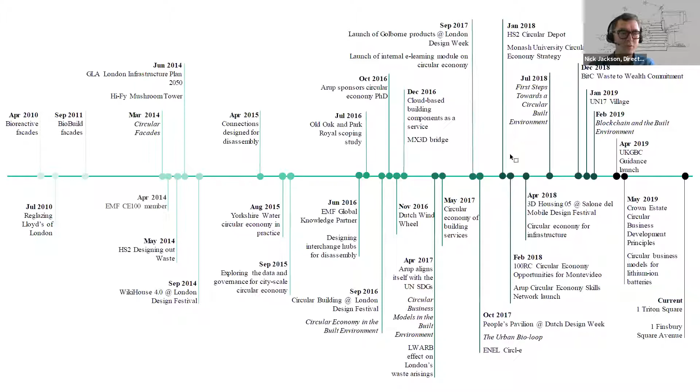Triton Square didn't come from nowhere. Arup have been working in this sector for over a decade in terms of thinking about circular economy. We've been looking at it from a point of view of investment, experiment, exploration over 10 years. We've worked in that sector developing a framework for property in terms of developing a brief that we use internally around the planning, the design, the use of materials, all building around our approach to circular economy. This works across our whole business and is a strategy that is growing very rapidly in our thinking and work. Our relationship with the Ellen MacArthur Foundation is well established, and we have a very close partnership there.

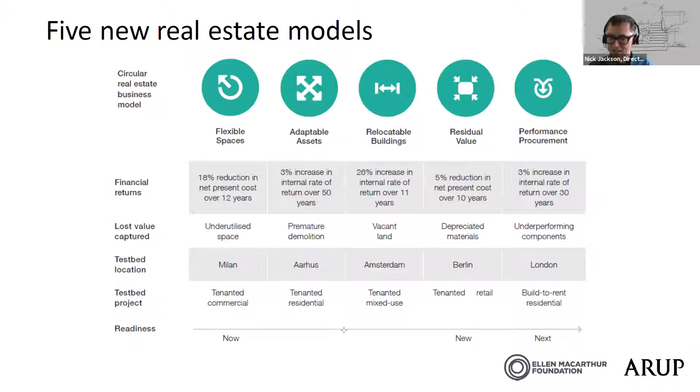That has worked through equally with developing an approach to real estate across a number of trial projects we've developed in conjunction with other partners like RICS and JLL, in terms of how we embed circular economy thinking in our approach. So I just wanted to set the scene in terms of where the thinking on the project at Triton Square has emerged from.

That sits alongside our commitment at Arup to align our business in all that we do and our activities to the UN's Sustainable Development Goals, the SDGs. As a global organization, we've adopted those 17 initiatives and goals to structure our work at all levels and embed in our strategies around design work and the projects and thinking that we take on.

At the moment, we see ourselves as on a journey. We're moving out of a point of green, sustainable design and looking increasingly to how the thinking in our work can lead towards restorative and ultimately regenerative design in the way we approach our work in the built environment. So that sets the context for Triton.

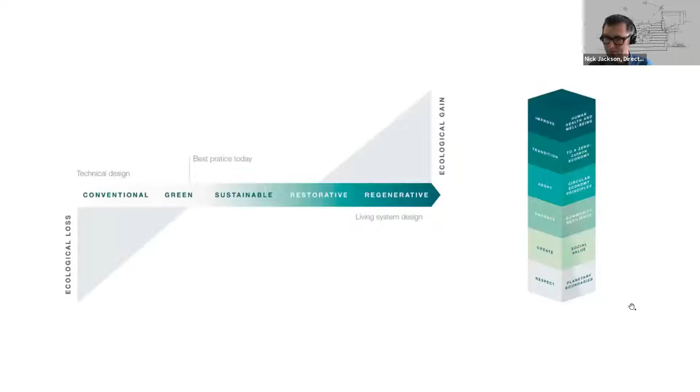The simple headline really is the work that we've achieved there has saved approximately 40,000 tons of CO2 emissions over the 20-year life of the lease. That is made up of embodied and operational carbon. And obviously there are many ways you can equate that to understand what that means, but in simple terms, in what a car does, it's a pretty staggering figure.

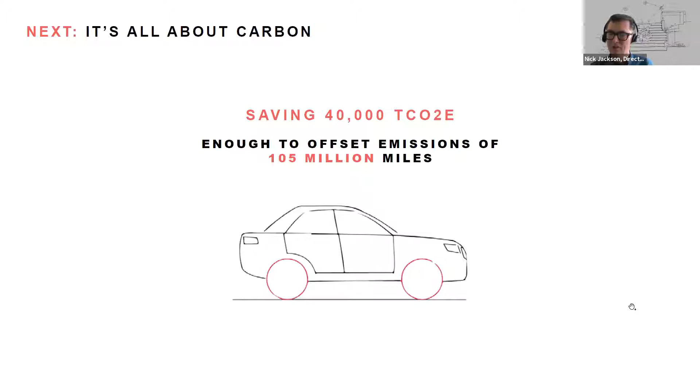And that work has come from a whole series of initiatives. There are some headline design changes or design initiatives in the project we've brought to it, but there's a lot of other smaller moves, which I will explain as we go through.

So the project, just to give those who don't know the building, when it was pre-let to Dentsu Aegis, it was the largest West End pre-let in the last 20 years. We began with a design and brief that was about achieving BREEAM Excellent, and that has moved over the course of the project to achieve BREEAM Outstanding, which is one of the first buildings for British Land, certainly, that has achieved that landmark, and one of the few large commercial buildings of this nature that have been able to achieve that as a standalone building that's not linked into a large energy network.

It's 500,000 square feet. We've saved 40,000 tons of carbon through the various initiatives we've brought to the scheme, 54% reduction in the embodied carbon. What we did demolish, which was very limited, and the waste was all diverted to other uses. So initiatives like plant that was taken off the existing building has been upcycled and reused, exported and made use of. We've made significant reduction in water usage on the building.

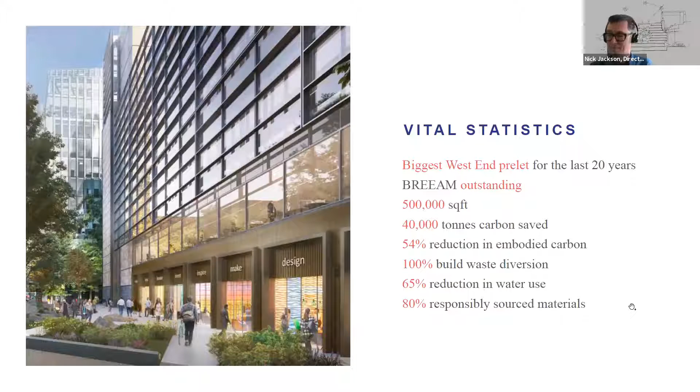If you think the original building was designed in the 90s, a lot of the approaches we can now bring to the design of the building weren't available then. And 80% of the materials we have used, we've been able to responsibly source. We would like that to be higher, but that is a reflection on the marketplace that we're procuring from.

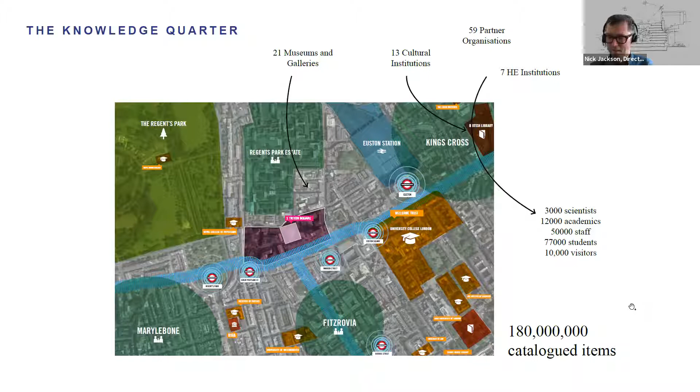The building, for those who don't know, sits in the center of Regent's Place on the Euston Road. It forms part of the Knowledge Quarter, which, as I think everyone will know, is a very vibrant and rapidly changing sector of London on the northern edge of the West End, and becoming increasingly a location for research and academic work that obviously has grown since the Crick opened. To the south, we have Fitzrovia, UCL, and Marylebone with its education institutes and museums and so on.

The trigger for the project really gathering pace was the pre-let from British Land that really galvanized the scheme into moving forward. And the approach that we've taken to sustainability and carbon has been embraced by the tenant, Dentsu, in terms of the way they're thinking about their fit out, which will start very shortly, fully designed at this point. The building will complete during April and be handed over to the tenant team to progress into fit out.

So the thinking we brought to this, in a way, there are some big moves we've brought to the design thinking, but actually it's all the small moves really that have been the key to the changes we've made. The strategy was to really look in every area of the design, every part of the thinking, and bring the same attention to detail about what can we do to reduce the amount of material we use, what can we do about the carbon content of material, what can we do about the recyclability or the reusability in terms of circular economy thinking to the scheme.

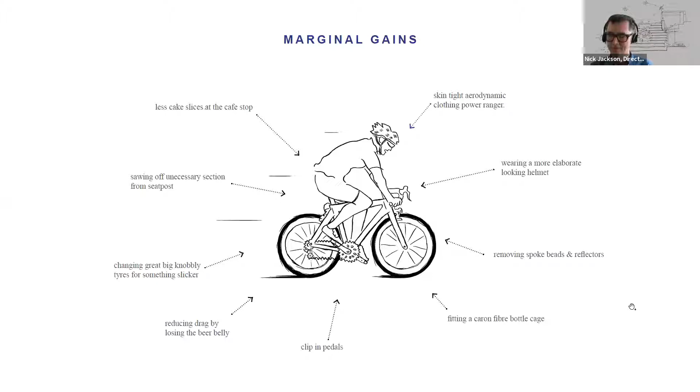So that sort of initiative that one sees in sports and so on, and obviously cycling is an obvious reference for that, has been brought to bear in all sorts of parts of the building.

So the headline story, like all refurbished buildings, is obviously we've been able to take advantage of repurposing and reusing the existing structure, bringing our engineering thinking to that to minimize the amount of new structure we need to bring to the scheme.

The approach to the facades, where we have removed large sections of the existing facades, and rather than replace them to upgrade them, we've refitted them, refurbished them, and brought the same material back on site and reinstalled them, which is, we think, probably one of the first examples of that being done, certainly in the UK, if not in Europe. We've made other changes to the scheme, which Phil and Christina will talk about.

Things like changing the staircases, so they no longer sit within the primary thermal envelope and are heated all the time. We've moved those so they're no longer part of the primary heated space. They're tempered so they don't get too cold, but we've moved the thermal line in the building to change the energy usage.

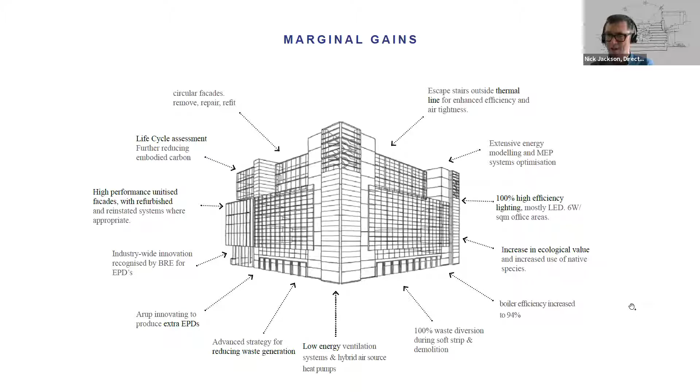We've replaced all the plant on the building and upgraded it very significantly to highly performing plant. We've taken advantage of the capacity of the existing building to allow that to work in a highly efficient way, and a whole number of other strategies that we brought to bear.

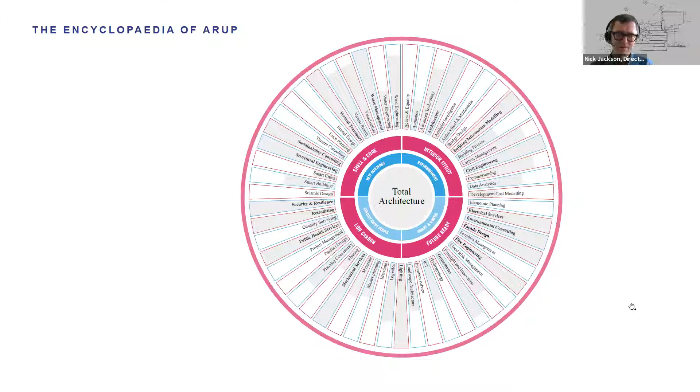The project has been designed by all the disciplines within Arup, so the architecture team, who now sit within Arup as a whole, worked closely with the engineering teams on structures, MEP, lighting, acoustics, and sustainability. They all contributed at various stages, particularly in the analysis of the use of existing fabric and materials. The carbon team within our sustainability team put a lot of work into areas we probably hadn't looked at before in this depth on One Triton Square.

The brief was quite simple: to make this make sense for British Land as a development, we needed to double the size of the building. That's a pretty simple metric, and most architects will recognize that on a big refurbishment or rebuild project, you need to achieve that level of upgrade. That was a challenge with the existing building and its foundation system, to create that area without changing the footprint of the building. We've developed that in a number of places, which Christina will explain.

It needed to be highly efficient. We needed to hit very high net-to-gross ratios and make sure all the operational areas worked efficiently. Sustainability and well-being were embedded right at the outset in thinking about the building. We needed much higher ambitions in sustainability and carbon energy usage than the original building, but also a wonderful building to be in, with really good daylight and an enjoyable space to move around and work in, to attract tenants. That goes hand in hand with quality.

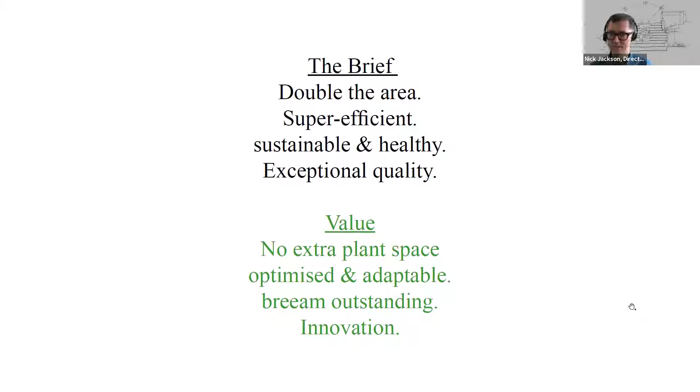The key value changes we brought were doubling the floor area of the building without changing the area given over to plant. It has a single basement, highly constrained. We put a lot of cycling facilities into the building that weren't there in the 90s building, and we kept the same area of roof plant we had originally—a little bit taller maybe, but that area is working much, much harder in terms of what it can deliver for BREEAM rating, which required a very innovative approach.

Originally we were just looking at BREEAM to think about what we could achieve, and we moved that target from excellent to outstanding over the course of the project, without the level of cost increase one might expect. That cost is relative to what British Land would normally see as the budget for a building of this nature, but it was very marginal—much more down to where we put the effort and thinking hard about where we spent our budget in terms of materials and engineering.

The original building, by Arup Associates, from 1998, was built around the time Canary Wharf was really starting to gather pace. It was built as a support building for a trading bank—going to have trading capacity, but used by the original tenant as a support building. It was a big building with corner cores, a low-rise five-story building that reflected the horizon of Regent's Place at that time. But it was a well-built building, and the key thing is we had all the records and information on how it was built.

We had all the drawings, the working drawings from contractors like Scheldebouw, and our own design drawings and engineering. That was a fundamental prerequisite for the re-engineering of the building that we were able to go through with the new design.

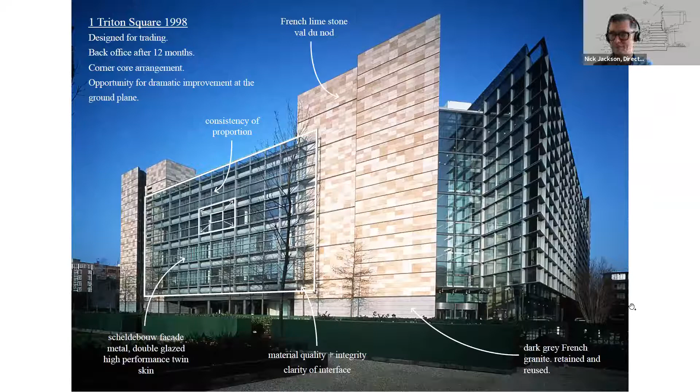The existing building is quite deep in plan, and it has this unusually large octagonal atrium in the centre of it, with a roof light above that.

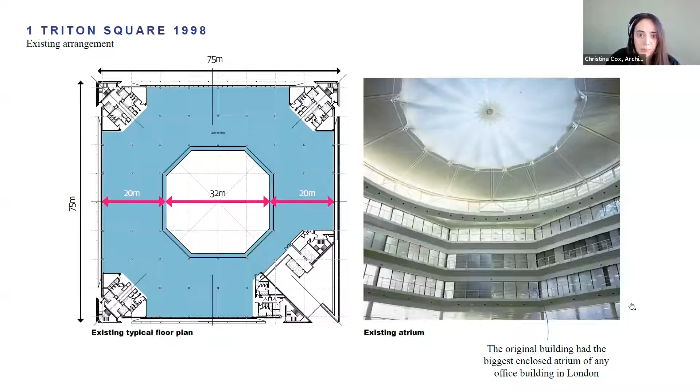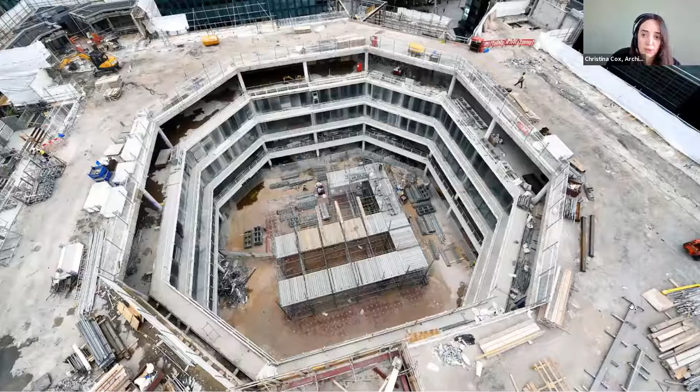This is an image towards the end of the demolition phase, where the plant is all removed from the roof, the roof light's been removed, and the top of the cores have been removed.

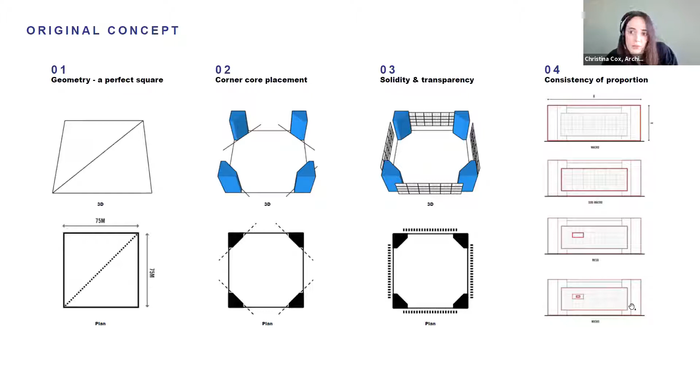In terms of the original concept for the building, the original design principles included a perfectly square plan, four corner core placements, and secondary screens cladding each elevation. There's also consistency of proportion from the macro, the overall elevation, through to the micro, the individual panels making up those secondary screens.

So when we were considering the refurbishment of the building, it was important to be considerate of these original principles. The key interventions included consolidating the central atrium, bringing it in from 32 metres across to 17 metres, and extending the cores upwards. When we extended the building upwards, we set back those levels, not only to create some amenity, but also to maintain that consistency of proportion across the elevation.

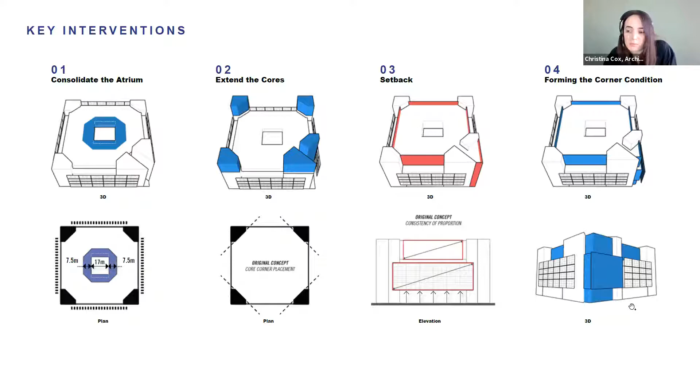And then finally, reconfiguring the main entrance area to create a more dynamic reception area that fronts onto Regent's Place.

In terms of the building organisation, the four cores serve the office levels, level 1 and above, and the ground floor plane, which is mixed use, is accessed via the perimeter. Originally the ground floor had an undercroft cutting right across the centre, and the ground floor facade was also set back, so we've pulled the ground floor facades out to better address the public realm.

To the north, there's an affordable workspace area. To the west and centre is a large gym area with a cycle storage area in the centre of the deep plan. To the south is a dedicated secondary entrance for the office, a retail space, and the main entrance facing onto the plaza.

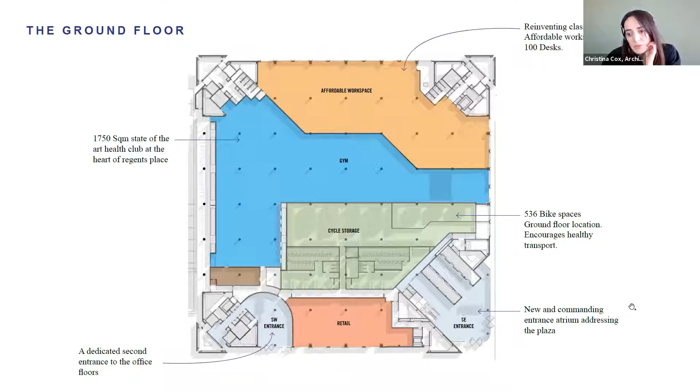In terms of the typical upper levels, as mentioned, the atrium was infilled, so it has a stepped profile to create a more dynamic space. The lifting strategy was also reworked, with the main lift bank now including an extra four lifts, and an increase in the washroom areas in the cores.

And also infilling the six-storey atrium that sat above the original entrance, not only to create more floor area, but also these smaller balconies that look out over the Regent's Place Square.

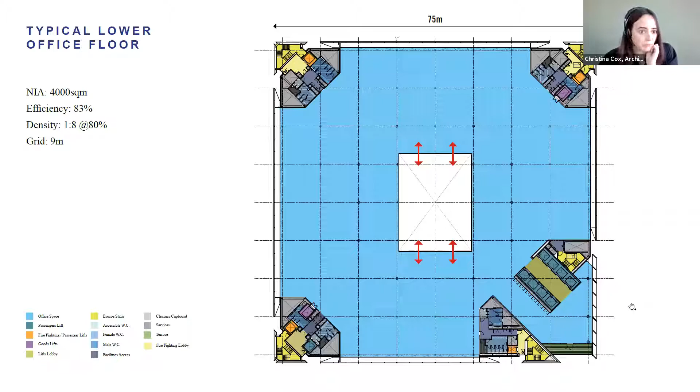Through those interventions, we managed to increase the office area by 85%, and as Nick mentioned, with no additional space for plant required.

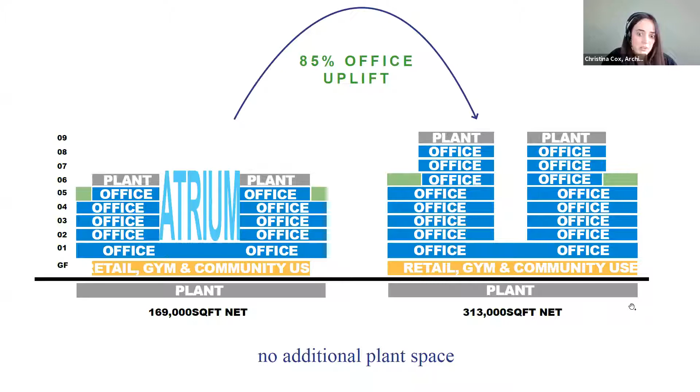Thank you, Christina. Within that move to create this almost doubling in the net area of the building, the work we started doing as the project developed in the early stages was looking at the combination of what the operational carbon was, which sits within what we do normally, but starting to look increasingly at the impact of the embodied carbon.

A key factor for us as we look forward to other projects is that as the energy supply grid increasingly moves towards all-electric buildings, we see most of the buildings we're now designing as all-electric. As the grid cleans up, the emphasis and importance of really understanding the embodied carbon in design thinking becomes increasingly critical.

That underpins the deep rationale we're now asking ourselves with all our projects across Arup when confronted with a proposal: is there something there we can reuse? Do we really need to replace a building, or is there a way we can repurpose it? If it's in one use, how could you transform it into another? What can we do with our engineering and design thinking to understand that impact, because we see embodied carbon as an increasingly important factor in the overall carbon impact of projects.

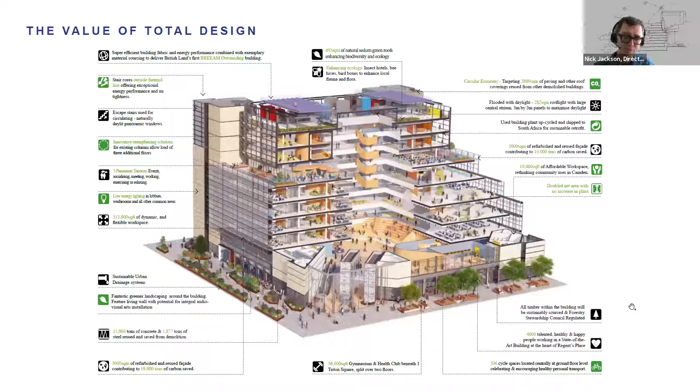We've got recycled paving and recycled ballast that's come off another building that we've been able to use on this building, rather than going out and buying new river ballast and new slabs just for walkways.

The existing building had 35,000 tons of concrete and 1,877 tons of steel reused.

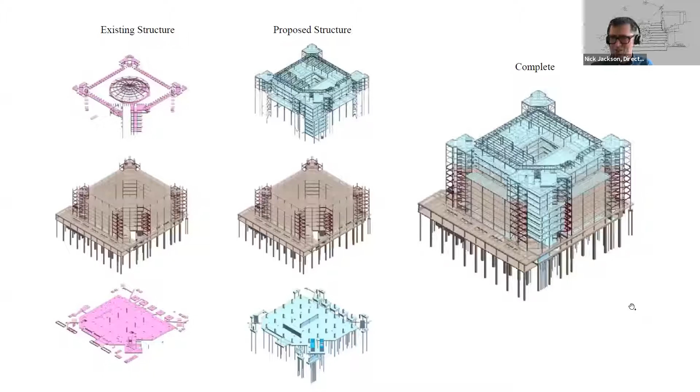The brown on this slide is the existing structure, and the blue is the new. So we peeled a little bit off the existing building at roof level, took off the roof lights, took off the top of the cores, took off the BMU tracks. We've retained the body of the building, and we've retained all the substructure and so on. There should actually be some piles hanging off the bottom of that pink plate.

And then we've basically inserted this new structure in and around the existing structures—adding floors down over the reception that Christina talked about, inserting additional piling underneath the building to pick up the load, and then a very light, efficient composite steel and concrete structure on top, all with low carbon GGBS concrete.

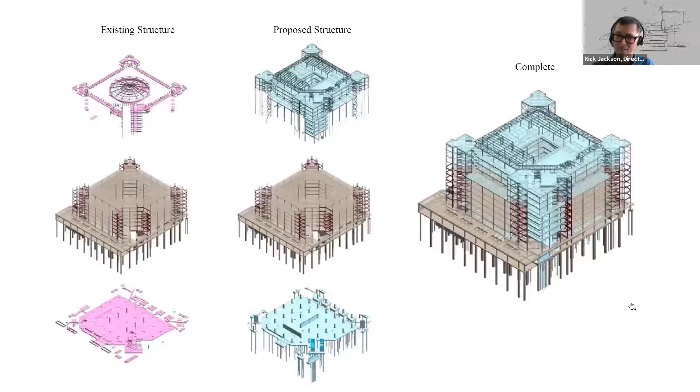So whilst we might now consider exploring whether we could use timber for this, that's still very challenging in commercial buildings. We looked hard at where we were having to use concrete to really reduce the amount of carbon.

So we have this lightweight steel frame that drops in over the existing building. Our engineering colleagues and the structures team did a lot of work to reanalyze the existing foundation system from the design records, and relocate or reapportion how we were using the loading within the building, because it had been designed with some quite high loading in areas. We were able to transfer those loading allowances around to create the capacity to get this extra space and get the building.

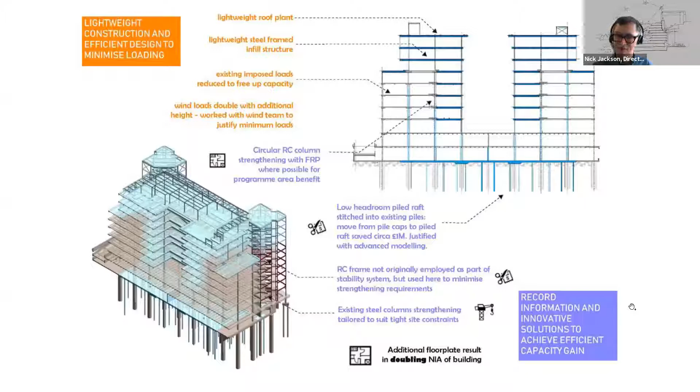Down in the ground, that was pretty heavy work in places, working underneath the existing slab. We had a low headroom piling rig in there. Where we could, we were using carbon fiber wraps on columns to strengthen those, in conjunction with threading piles in.

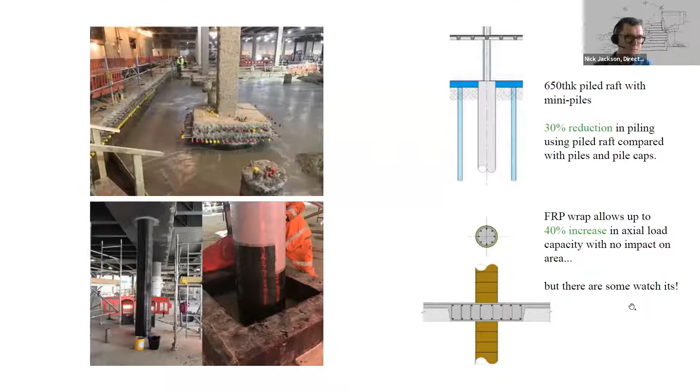There were localized areas where we had to take the existing slab out to thread piles through. But because of the engineering analysis, and because we had the records, we were able to have confidence in how we combined new and old. That meant we could reduce the amount of caution in some of the design decisions, to really optimize the design of that foundation system.

A nice view here through the basement while that work was going on—you can see in the distance some little steel frames going up around.

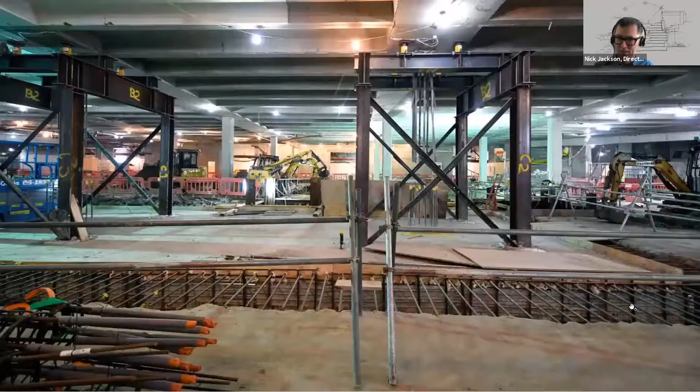There were one or two columns that, despite all that, we couldn't justify when we analysed the as-built condition of concrete. So there were 5 or 6 columns where we had to prop the building, take out columns, knowing the reinforcement was there, supplement that reinforcement, and recast them in key locations around the atrium where they were picking up the highest load.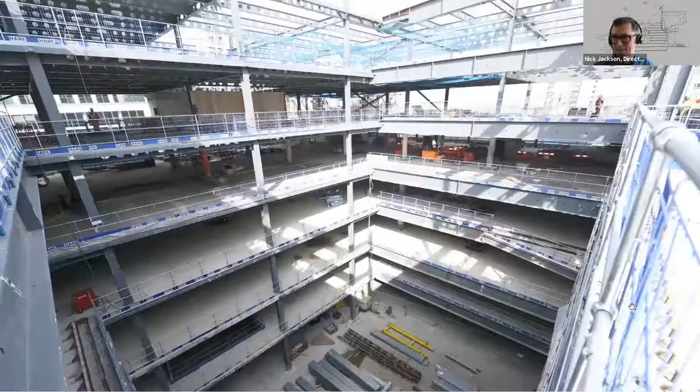So this is the reformed atrium—still a very, very generous space, a fantastic space to be in. Once the tenant is in there, they're adding some staircases, I believe, to run between floors. It will be a terrific heart to the building.

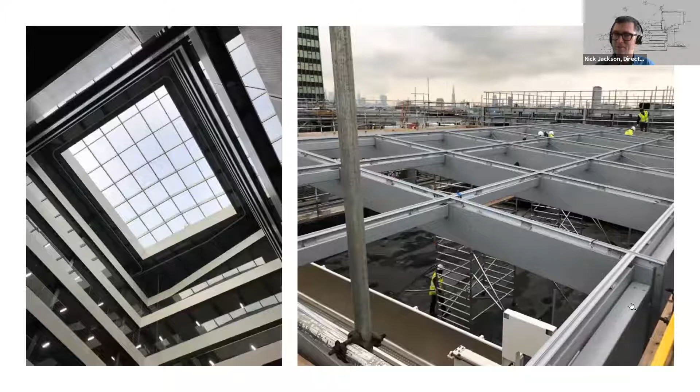The new roof light lets light down, and it's got a very nice, simple, elegant graphic quality to it.

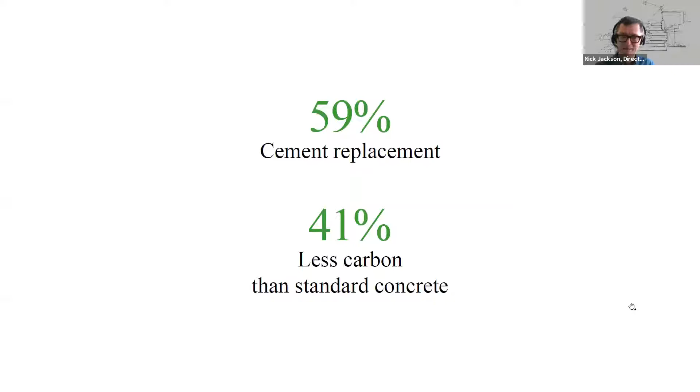The concrete work in the new structure was 59% cement replacement, giving 40% less carbon in that element than we might have expected in a normal hollow rib type floor system.

And then the last part of this short discussion of what we've done—we're going to explain the approach to the facade, which Phil will take you through. It's pretty unique, we believe, in terms of work on a building of this nature, really being able to combine new and old structure.

Yeah, so we had around 3,000 square meters of facade on the building that was refurbished. This was taken off the building and sent to a factory in Basildon, where it was inspected, cleaned up, gaskets replaced, repaired, and glass panels replaced if necessary.

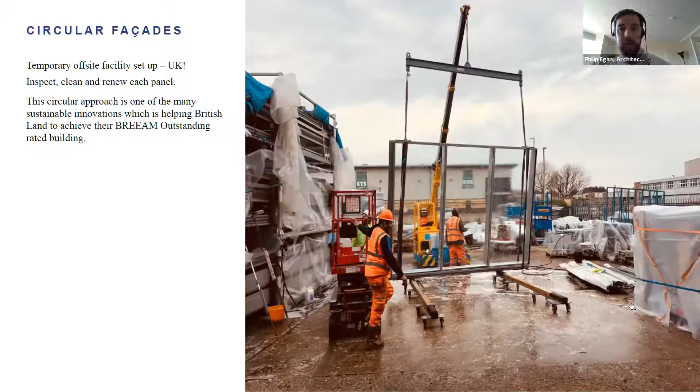So it's just a photo of that. Looking at the building as a whole, we basically tried to retain as much as possible.

So not including the main entrance facade on the left-hand side, we more or less retained the majority of the facade from level 1 up to level 6, and we retained all the stone on the cores from ground floor up to level 6 also.

So basically the double skin existing on the building is the central part of the building. The outer skin was taken off and refurbished, while the inner skin was largely retained, cleaned up, with any remedial works done. The glazing in the inner skin was taken off and replaced by new glazing in order to create a more energy efficient building.

The lower part of that double skin was completely removed because the whole facade was moved up one level. So we took off the lowermost panels. The supporting structure that fixed back to the slab was also modified, and that was replaced back up on the new level 6 slab.

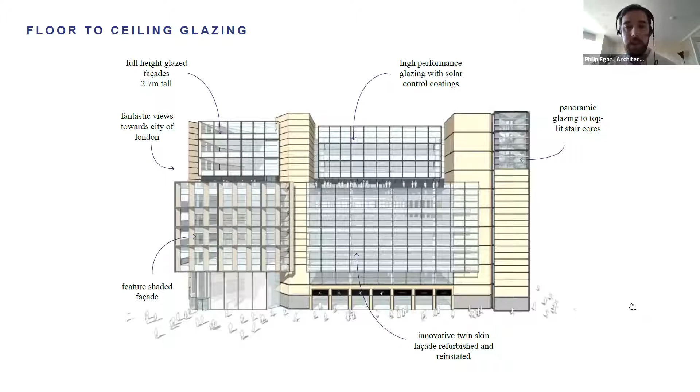So if we move on to the cores, as Nick mentioned previously, we're retaining a lot of the facade at the lower levels, and we've got these new glazing panels at the top, which give us great views out and around over to Regent's Park, over to the financial area of the city, and also up to Parliament Hill.

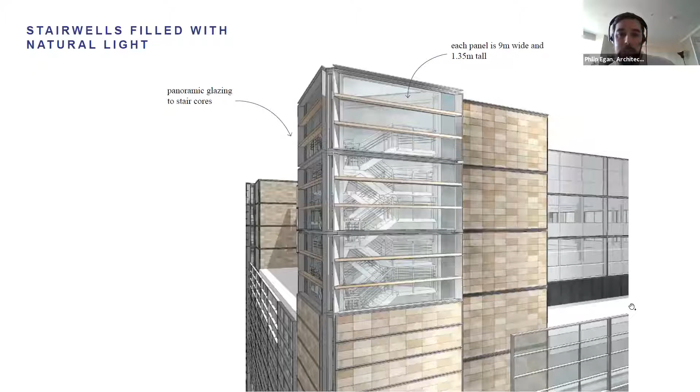So that lets a lot of light down into the stairwells, and we also moved the thermal line back towards the office itself. The existing facade was somewhat leaky, so we thought it was a better opportunity to do that and have a second layer of defence for the building.

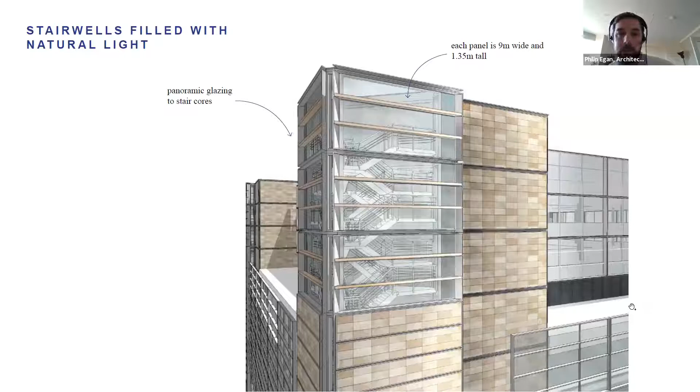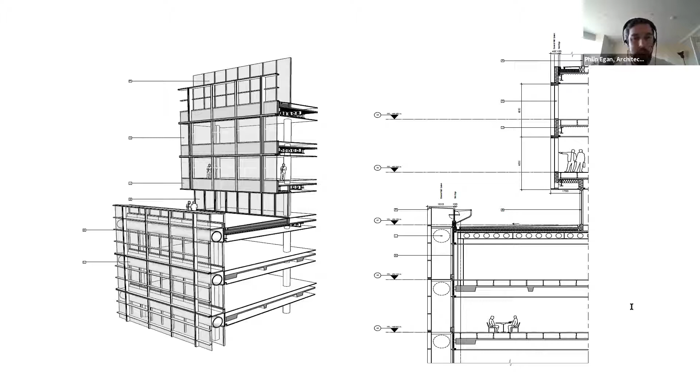So again, moving from top to the bottom of the facade: at lower level we removed a whole band of facade, which was taken off, refurbished, and put back on at a high level. The outer of the double skin was refurbished, and the inner had new glazing, more energy efficient. We then got 6 metre wide terraces about level 6, and from there we have a new facade upwards, again all energy efficient coated glass, and also brise-soleil on different facade elements.

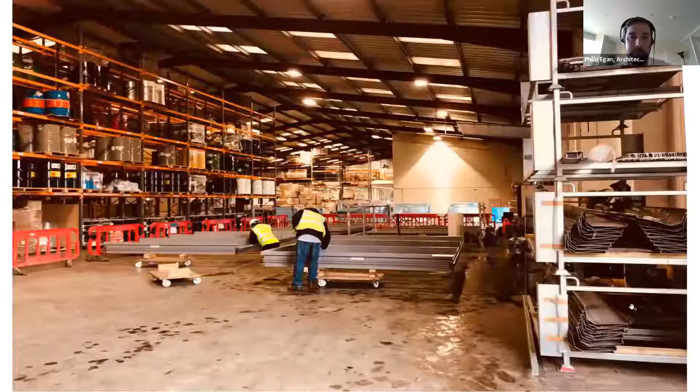And again, just another shot of the factory in Basildon where the facades were cleaned up and repaired when necessary. It's worth saying this is just a shed they rented to do it, so all the stuff on the left has got nothing to do with the work on the facade, really. It's very simple, they just needed space.

And the saving in transport on this, by not taking it back to Scheldebouw's factory on the continent where it was originally manufactured, was enormous when you totted up the carbon impact of simply not moving this amount of material around Europe.

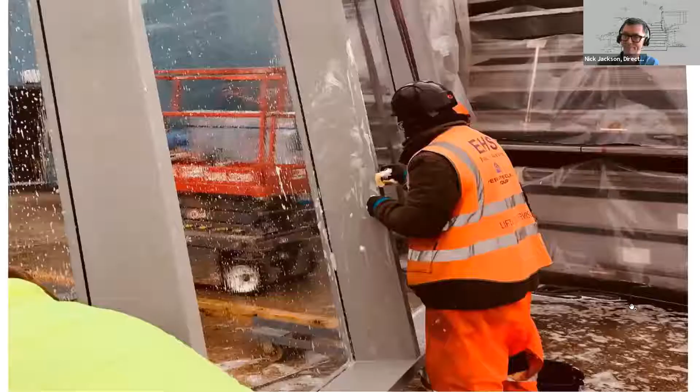So again, more cleaning photos on site. And the powder coating was all checked and tested, it was all durable. I mean, it might have been beyond warranty, but it was all in very good condition, to be fair.

So we only needed to replace one or two glass panels, and we had existing spares, so we were able to replace them like for like. The samples we compared against the existing PPC were pretty much a perfect match, so there was very, very little fading on the existing, a testament to the original quality of the building and the panels that were installed.

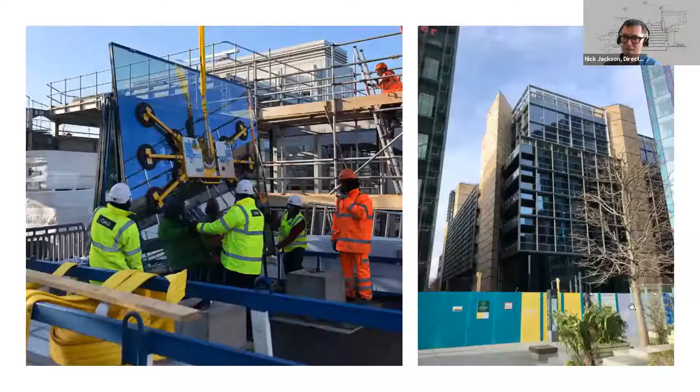And the other key point was that it had been assembled in a way you could take apart. So not only did we have the drawing, so we knew how it had been assembled and put together, it was all basically able to be dismantled. The amount of silicone and adhesives in this was very low, really, so it's a simple mechanical process.

Just further shots: to the left is the image of the 3 metre by 3 metre glass panels that went onto the atrium roof, to let all that light down into the centre of the building. To the right is the current status of the building from the plaza, with the new entrance glazing in, GRC fins above that, and then new glazing above that.

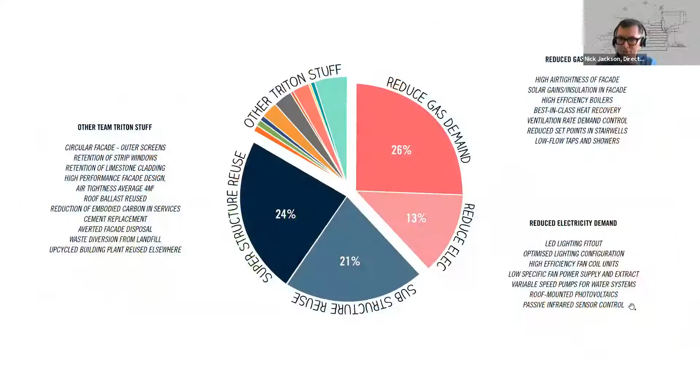As the project has gone on, we have probably about every 6 months refreshed our calculations around where we are on the carbon content of the building, both operational and embodied.

Obviously, as a refurbishment of an existing building, there's an awful lot that you gather simply from the existing structure, which is about 24% of this, and then 21% from the substructure. But really everything else on that pie chart is the area we've been able to influence through the design thinking, the approach, the engineering, and the work with British Land and with Lendlease, to try and reduce not just the slices but make the whole pie smaller. So you could create the same diagram for a new build, conventional building one might see elsewhere under construction, and not only would the pie be a different shape, it would be much bigger, simply in terms of carbon content.

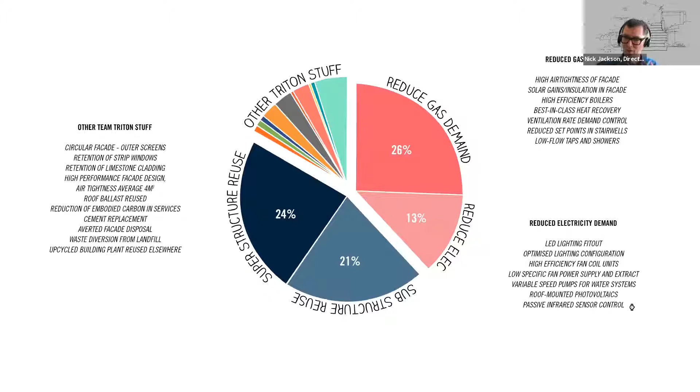This is the work our sustainability team has been working on, developing tools within Arup as a whole that now we go through on all our projects. Really, the last part of it is that this has all been about teamwork, the key enabling aspect in terms of the shared ambition.

Thank you, Will. So back to you. Thank you very much, and congratulations on the project. Really, really interesting, and not quite complete either, by the sounds of it - the fit out, you were saying.

No, we were due to finish the shell and core at Christmas. Obviously the last 12 months have not been the easiest time to carry on constructing, but Lendlease have done a fantastic job keeping the project going with support from their subcontractors. We will complete the shell and core in about the next 6 weeks or so, and then the tenant team will come in and commence fit out, which I think is on the order of 12 months for them to fit out until it's fully occupied and alive.

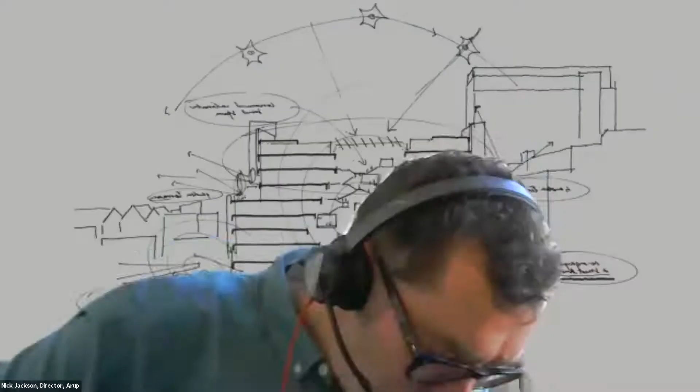I mean, obviously this is a special project and one that you're rightly proud of, but how unusual is it for Arup? Is this the way you're going to be doing stuff? Obviously you're not going to stop doing new builds, but no?

In a way, what we're trying to say is we don't think it should be a special project. In 10 years' time, you'd like to look back and see that for most businesses, this is the starting point when you look at a project like this. The principles of circularity are...

entirely reliant on the quality of that information and data. The buildings we build now, if in 25 years' time we can keep doing what we've done on Triton, it's wholly reliant on whether the quality of the build in the first place was at the right level, and that the data is there that people can repurpose and understand what they're doing. Otherwise it will just be wasteful in material terms.

But as you were saying, the cost on this one was marginal, really not much more expensive than doing a comparable new build.

So is that enough to convince clients, in a really important way, so that most clients go down this route?

Yeah, the cost premium we were trying to highlight, going from excellent to outstanding, was minimal, really, in the context of the quality of building British Land would normally build. The increase there was minimal.

Yeah, absolutely. I would hope all clients, when they're looking at an existing building, scratch their head really hard and understand what the embodied carbon in that building is before they start taking decisions to demolish. I think that's beholden on all of us, given where we sit with the planet and climate change. We have a moral obligation to be doing that with all our work.

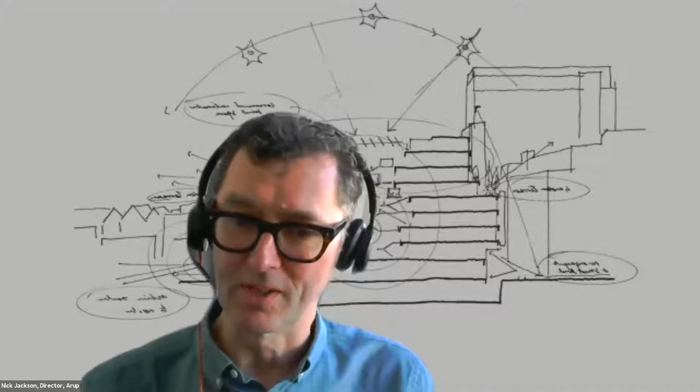But absolutely, I would hope that over the next decade we see that marketplace grow, so that when we're specifying things on the building, it's much easier for us to go out and look in that marketplace and say, well, we can buy there, and the supply chain believes they can get it easily, and therefore they won't put a premium on it.

Which unfortunately recycled materials still carry that premium, because people think they're hard to find or get, or be certain they'll meet spec, be warrantable. We tie ourselves in knots with warranties.

Okay, well I'm going to turn to some questions from the audience now. First one from Duncan Walters, who asks, how specifically did the project compare against each 2030 LETI target, A1 to A5 and beyond?

Okay, you may not know this. I'm not sure whether Christina or Phil are close to that. No, that's perhaps more one for the engineers. Yeah, I'm not aware whether we've analysed it yet against the LETI targets or not. We've been doing quite a lot of work with LETI, so I suspect there's somebody I can go and find in Arup to answer that.

I'm sorry. That's okay. And Kirsten Kane asks, there was a saving of, was it 54% or 56% of embodied carbon? What was that compared with? Was it a typical London office building of the same kind of size?

The embodied carbon is compared with a new build office building, to I think it's the real estate benchmark standard. It's pretty close to a BCO type building. That's what that was compared with, taking a similar spec, down to ground, including new foundations.

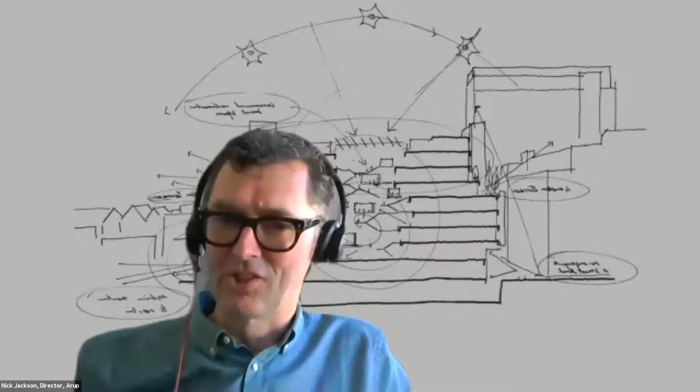And Stephen Howlin asks, did excluding the stairs from the thermal envelope save much in terms of carbon? Well, it has in energy terms over 20 years - you're not heating those spaces. It saves some, and actually the point in a way is that all the small bits do add up. Yeah, that was this thing of marginal gains. So actually it's looking in every part of the building going, okay, step there, step there, step there. Just keep turning over the stones and seeing what you can do.

Was there anything - you mentioned that it was D&B - was there anything that precluded, with the sort of cost savings and value engineering that came in? Is there stuff that you wanted to do that you couldn't because of that?

I don't think so, no, I think it was probably a smooth process. It was quite good - a very open book, collaborative D&B process. The D&B is as much to do with giving the contractor the control and the ability to run the project the way they want, but it's a pretty open book process with the client in terms of cost. And equally, it was bought off a very developed stage 4 design rather than a stage 3 planning scheme where there's a huge amount of open interpretation.

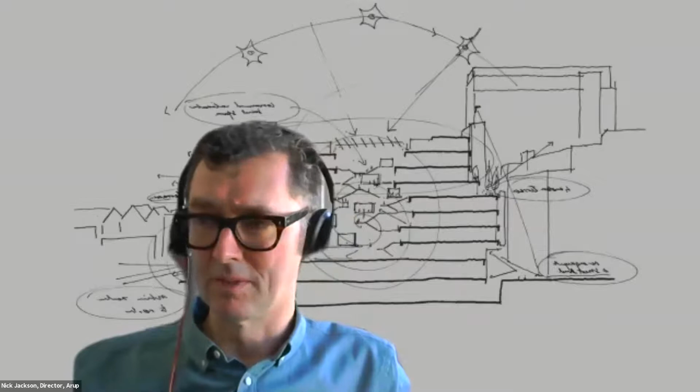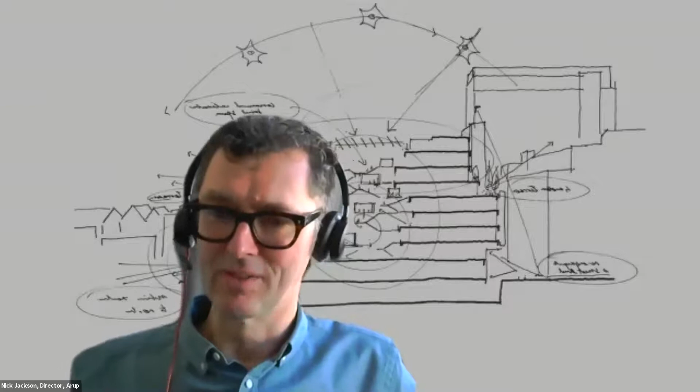I'm sure it was very important that you had a client who wanted to achieve an exemplar here. You can make arguments to a client who might not be as on board, but in this case British Land were really trying to push things as much as they could. The value they put on their impact on the environment at a corporate level, and the strategies and policies they've put in place - if you talk to Juliette Morgan about the work she's doing within British Land, it's really inspiring what they're trying to do and how they're changing their mindset on all their projects, whether that's Canada Water or Broadgate in the city. Similar agendas, different projects, different ways of playing it out, but the support they gave to this project was absolutely fundamental. If they hadn't been engaged with that conversation and really pushing it, we wouldn't have been able to do what we've brought to it.

Now a question about the steel. Robert Saculo asks if you could say a bit more about the reuse of steel - did you have to melt it down and re-roll it, for example?

Well, no, it was all wrapped up in cement and concrete. It's a staggering figure when you look at the amount of reinforcement in an in-situ concrete frame building like this, designed in the early 90s with high loads - there's a lot of steel embedded in there. There's not an awful lot of exposed steel, maybe some in the stairs, but it's mostly in the cores, and that was strengthened where needed.

So no, Robert, I'm afraid we didn't take anything and melt it away. There was glass that was recycled - some elements of glass we weren't able to reuse, so that was put back into the glass processing industry and was able to be melted down and reused.

Now a question about the fit out. Mathieu Dib asks how involved will Arup be in the selection of material for the tenant fit out, to make sure the same goals are reached in terms of certification? The fit out's being designed by Sheppard Robson, but with their client Dentsu Aegis, they are aiming, I believe, at the same BREEAM outstanding. We're close in certain parts of the building, obviously in conversation, but we're not involved in that design work.

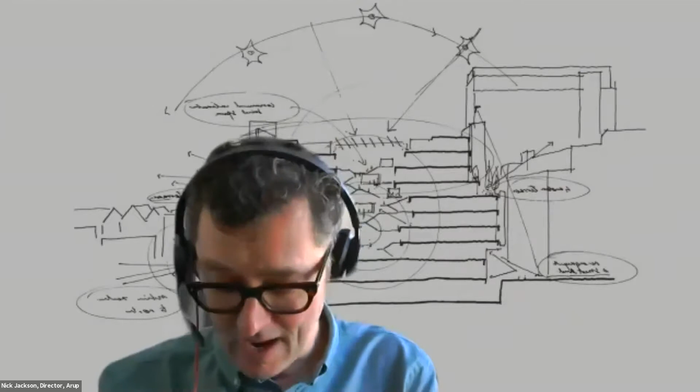Arup is moving into a building just developed next door to our offices on Fitzroy Street, which we've done the engineering on for Derwent. That's an all-electric building we're moving into. On that building, we've gone right back to sourcing the electricity from a power provider using a regenerative system - we've actually secured supply of that electricity from a known source that we know is green. That, I think, is the future. Less gas is definitely where we're heading.